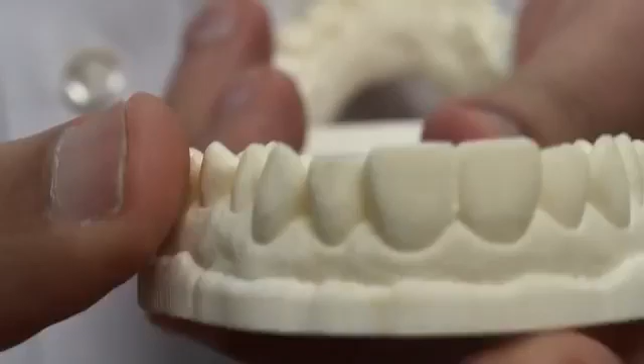If we take a closer look at this model, just to see what kind of quality we're looking at, we see it's got a very opaque material with a matte finish. What we've seen in other additive technologies is that those light-cured materials tend to have a somewhat translucent and shiny surface, which is very difficult to read, and can make it difficult for technicians working with those models. So we really love the look and feel of these models, and obviously the accuracy is an ante into the game to build digital models.

So what we'd like to do is walk you through the process of building these models, what it takes to get them into the printer, and then the post-processing for getting them ready to work with. I think you'll find that the post-processing steps for the MP3500 series printers with this great material are a very straightforward process to get a great final result.

And then what we'll do is some comparative analysis of the output of the final product and compare that to the original file to show you how accurate these models really are. So with that, let's get started.

All right, so we'll take a look at how we actually set up the build plate and send it over to the machine.

Okay, so now we're going to look at how to actually set up the jobs that we can send over to the printer. Today I'm going to be showing you the tool that 3D Systems provides with the printer called the Client Manager. This tool allows you to manage your printers, check the status, and set up jobs for them. I'll double-click our MP3500 icon here, and that'll load up our main setup window.

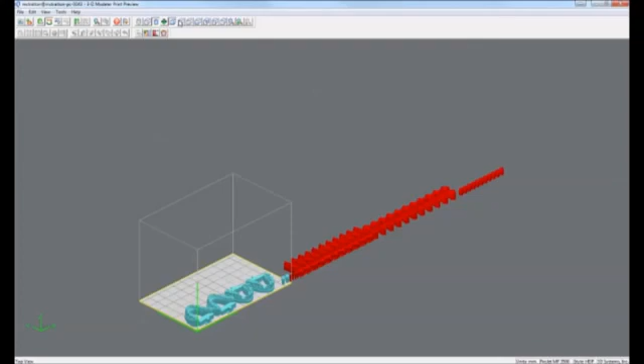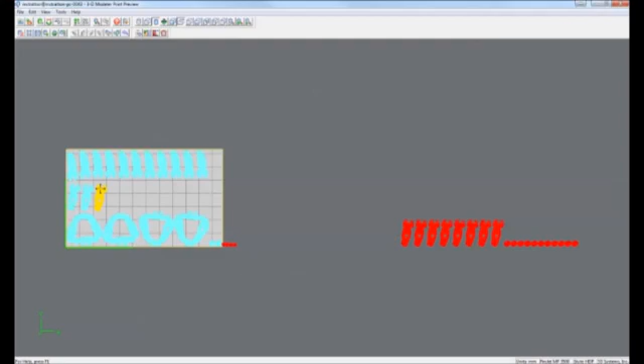Once those come in, we're going to click the preview button, which brings up the actual modeling program. This software does a decent job of auto-nesting parts, but in this case I have so many it's a little too overwhelming for the software, so I'm going to have to do some manual work to position these. This will be sped up a little bit so you don't have to watch the whole process, but ultimately you have full control over how these get oriented and placed on the platform.

So here is our finished platform with the parts nicely arranged. You can see you can put the dies inside of the full arches, which is nice. Basically all we do here is click submit, and there's very little calculation time that you have to wait for.

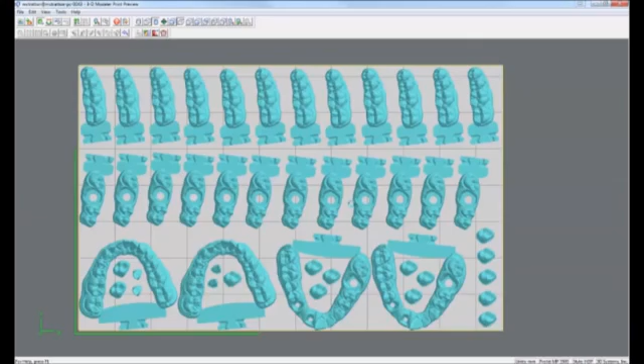This pretty much goes directly to the printer, even a platform of this size. Okay, so we've nested up our platform and sent it over to the machine. Let's get this loaded up, and we'll take a little tour through the system as well so we can see what all the components are.

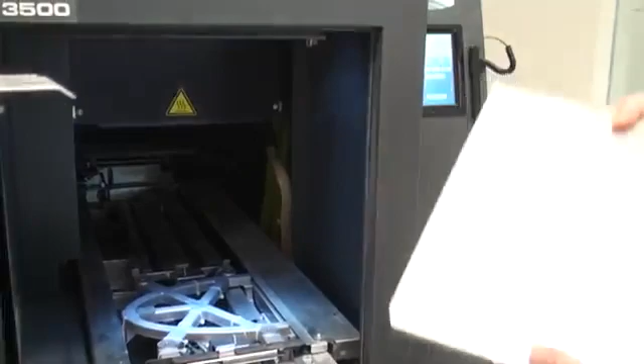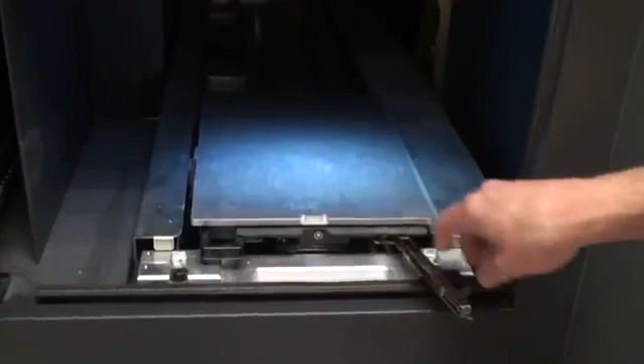We've got our clean build plate here, and this is just going to slide right into the machine. Basically open this little trap door here, slide the plate in. There's just a little groove in the front and back to lock it in place, and that's all there is to it.

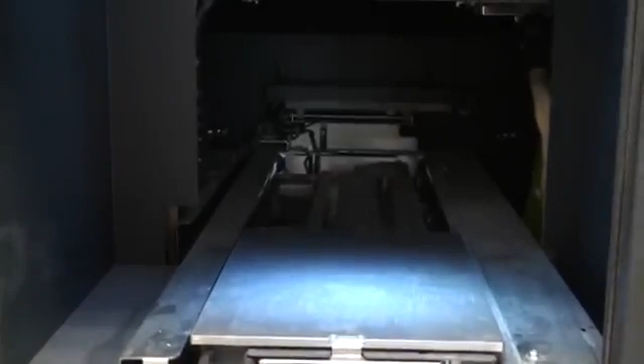Just inside the machine, you're going to see this platform roll backwards. It's going to deposit a layer of wax or part material depending on where it is in the build. There's a little planer that makes sure everything is perfectly level for the next layer to be deposited, and that'll repeat again and again until the parts are fully built. So we load that up, shut the door.

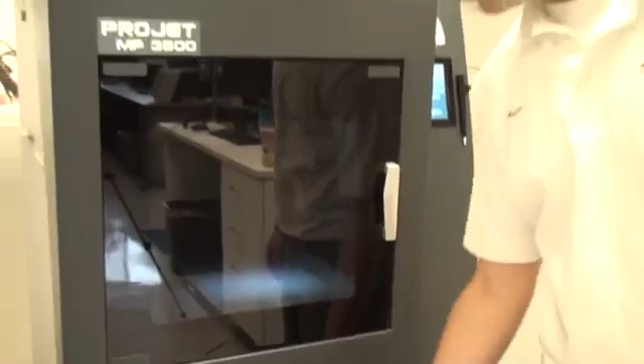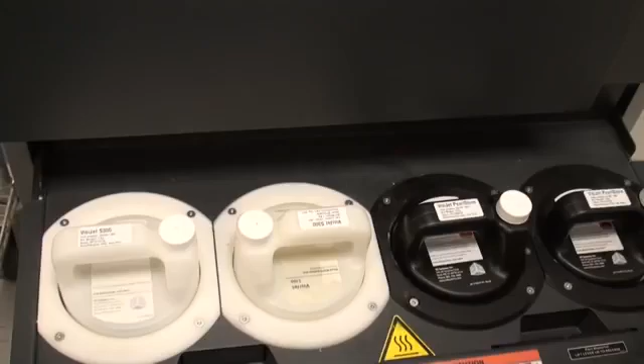To give you a little more of a tour of this machine, the second drawer here has all of our wax and part material canisters. You can see we have 2 of each type, so 2 wax, 2 part materials, which is very nice because one can fully run out and it'll swap over to the next one during the build. You can even swap these out during the build as well, which is nice. They're kind of hot swappable, so you can make sure you have enough material even if you didn't start the build with enough to begin with.

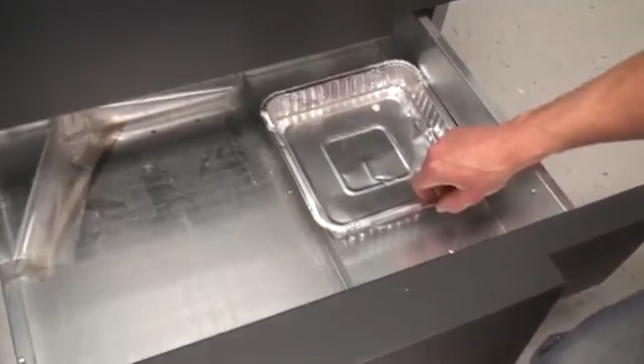Down below here, this is just the drawer to collect any wax residue left over from the print. When the planarizer comes and shaves off material, that'll end up draining down into here, which is just a little tinfoil collection basket, and it makes disposal very easy. So you can see a very clean workflow here.

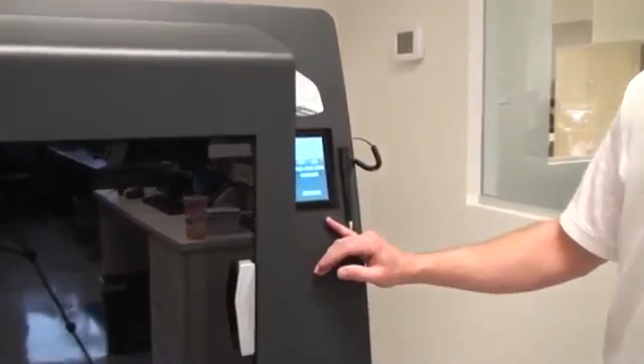Let's take a look over here. We have our computer control screen, and what we're going to do is indicate that this machine is now online. It's going to ask us, is the platform empty? Yes, it is.

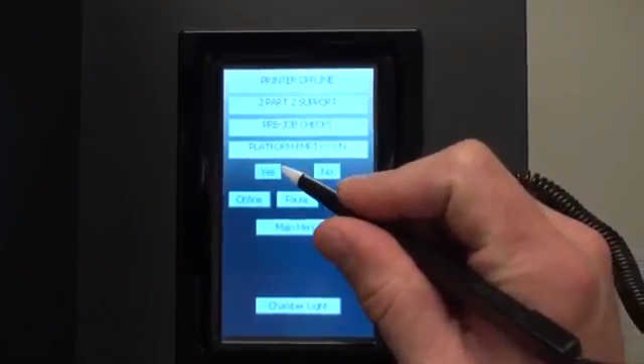We've already sent the job to the machine, but one thing it's asking us to do is make sure that we have enough room for the excess wax to dispose into. So we already looked at it, but we just need to open this door, check that we have enough room in our collection basket, and close it.

Then the machine is going to go through some initialization steps, cleaning the print heads, and the job will commence. So we'll check that out. We'll see a nice time-lapse video of this job being done. It should look pretty cool.

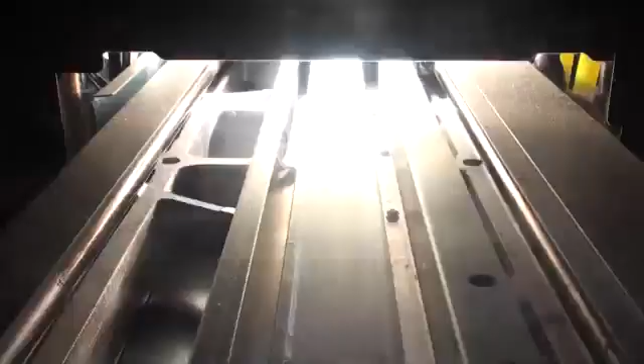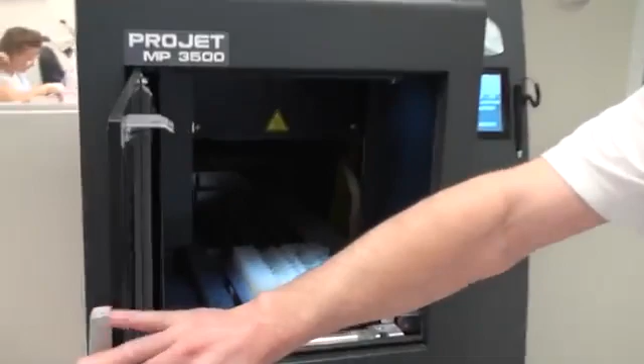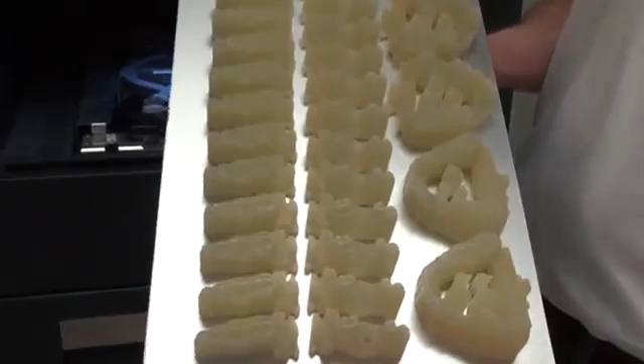Alright, our job is all complete now. It's been about 6 hours, which is about average time for a job like this. It's all based on the height of the parts, but this one took about 6 hours. Come in here, we're going to release the latch and pull out the build plate. This slides right out, and you can see our nice full plate here of finished parts. They look beautiful.

Now we can walk through the steps of how we actually post-process these into the final product. Let's get these parts off of this platform. It's a little peculiar process, but basically we're going to break off these dies by hand to start off with, and these can just be broken off with a little pressure from your hand. The easiest way to get these parts off of the platform is actually to smack it on the ground. So let's take a look at how we do that.

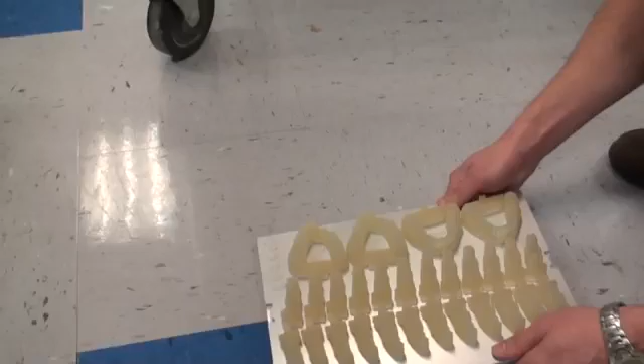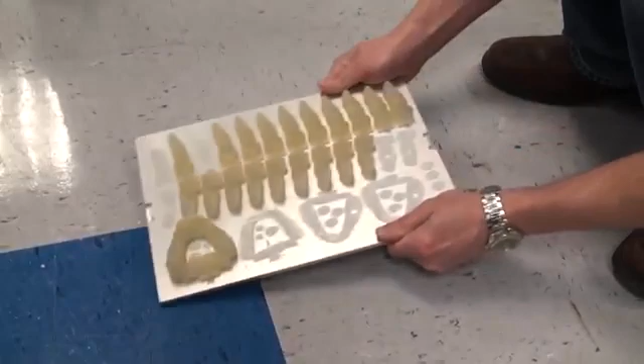We're just going to come down to ground level, try to get it nice and flat to the ground, and give it a few whacks. You can see it might take a couple whacks to get all of them off. Luckily the parts are very resilient, so there's not really much risk of damage here. Looks like we got some stubborn ones.

There we go. Nice clean platform. Alright.

So now we're going to go into the other room and throw these in the oven. We're in our post-processing room, and we're going to throw these parts into the oven.

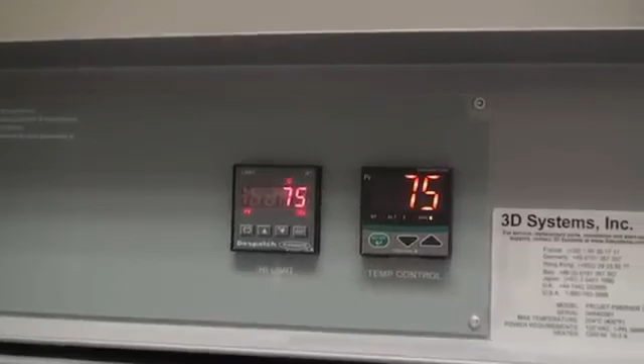You can see we have this oven from 3D Systems. It's set to 75 degrees centigrade, which is the correct temperature to melt the support material off of the parts. Take a look inside. As you can see, we've just got a grate here where the parts are going to rest, and there's a collection basin for any wax that drips off of the parts to collect.

And in the back you'll notice a Pyrex container containing some vegetable oil. So that's going to heat up to 75 degrees Celsius with the parts, and we'll basically dump the parts in there afterwards to clean off any of the remaining wax leftovers.

So first step, we're going to take our dies here. These can sometimes be small enough to actually fall through the grate, so we put them on a piece of paper towel just to make sure that they don't slip through. And we'll rest this right on the grate.

Now we can take the rest of our parts and just place them directly onto the grate over the basin.

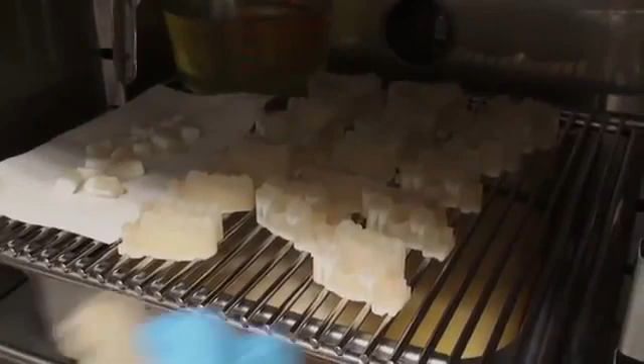Alright, so they're in the oven. We're going to close this door and wait about an hour for all the wax to completely melt off of the parts, and we can walk through the remaining steps at that point. See you in an hour.

Okay, we're back. The parts have been in the oven for about an hour and all the wax has been melted off at this point, so we can pull them out and perform the rest of the post-processing procedure.

So let's take a look in our oven. You can see all the parts are there, all the support material is basically melted off. There's going to be a little left over on the parts, but we'll take care of that.

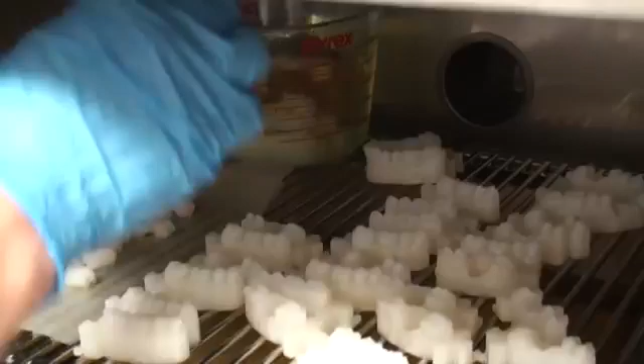We're going to utilize the oil that we've had in there as well, which is also heated to 75 degrees Celsius. So basically what we're going to do is take a few of these parts, dump them into the oil, and we're just going to demonstrate right now with a few of the parts, just so we can get through this process pretty easily. So take a full arch and a quad, put them into the oil.

This container is going to be a little hot, so I'm going to use a towel and pull it out of the oven. We'll keep the other parts in there so they can stay at the correct temperature.

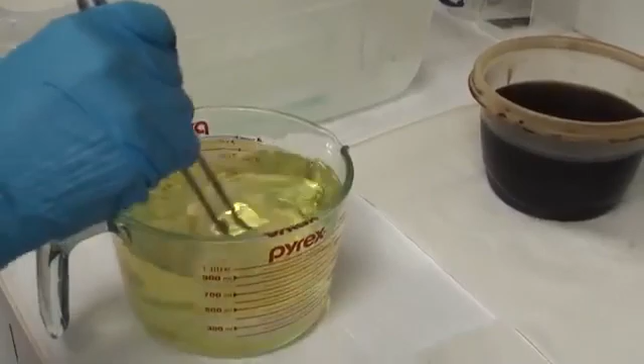Now we're going to come over here and basically just want to agitate these a little bit just to assist the remaining wax material to get off the parts. Doesn't need to be in there for too long, but you do want to make sure that you get as much off as possible. So I'll just stir this around a little bit.

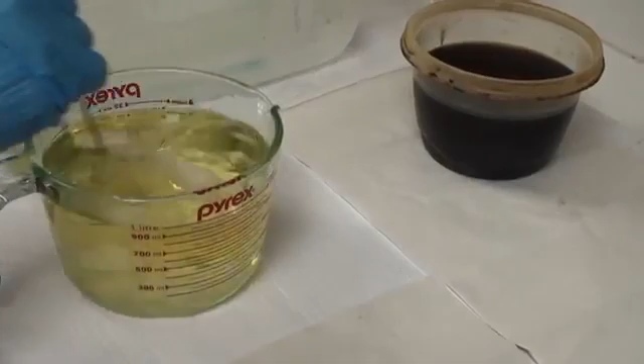Now the next step, if you look over here, we have a container containing isopropyl alcohol that's sitting in kind of an ice bath. And the purpose of the ice is basically to keep the alcohol at a cold enough temperature. What's going to happen is the models are going to be basically shocked, going from 75 degrees Celsius down to room temperature or less. And that's going to give it that nice matte finish that we're looking for.

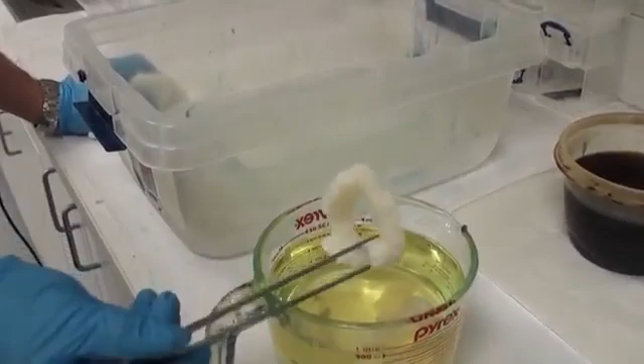And the alcohol is also going to serve the purpose of taking off any of the oil that the parts have been sitting in. So we can just go ahead, drop these into the alcohol bath, and that'll complete, or almost complete the process.

Okay, I want to give these a little stir to help any of the oil to fall off, and we'll let those sit for a minute here.

We basically just want these parts to fully cool down while in this mixture. And you can start to see it now, they're starting to get that nice white opaque color. It'll take a minute for the parts to fully cool down, but this is really the process where that matte finish is going to occur.

Alright, so we've dried off our parts, and the last step is to put them into the dye mixture. So basically we have a container here with, again, some isopropyl alcohol, as well as a few drops of this wood dye.

Actually, it's a very effective dye. You only need a few drops in the alcohol and the model will take on whatever color that we put in there. So these come in all varieties of colors. We've chosen the dark vintage maple for a nice beige color for the models, but you could really use any color you want. So we'll just take our parts and drop them into the dye solution.

Basically, we're just going to let these sit here for a couple minutes, and once they come out and dry off, we should have a nice finished product.

Okay, so our models are now out of the staining mixture and they're all dried here. So basically, we've got our final product, more or less.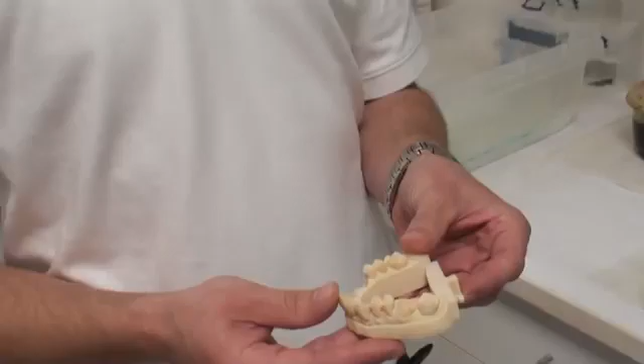Last steps here are to assemble the dies. So we're just going to slide these into the model. We got our two anterior teeth. We slide down nice and snug.

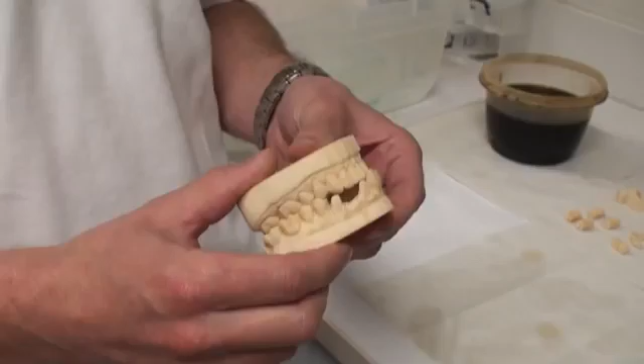And so we have our full model kit. It's ready to go. We're going to do a quick scan just to check out the accuracy of these parts, and we should be good to go. So let's go do that.

Okay, so we want to look at the accuracy of the models that we've just produced. One step that we didn't show you right here is we took the models that we just printed and showed you and scanned them in the 3Shape scanner. And now basically we're going to take that scan data and compare it back to the source data that we sent to the machine and see how they compare.

For this purpose, we're going to use a tool called 3Shape Convince. This is a utility available from 3Shape that allows you to do just this purpose, which is comparing two 3D models and seeing where they differ.

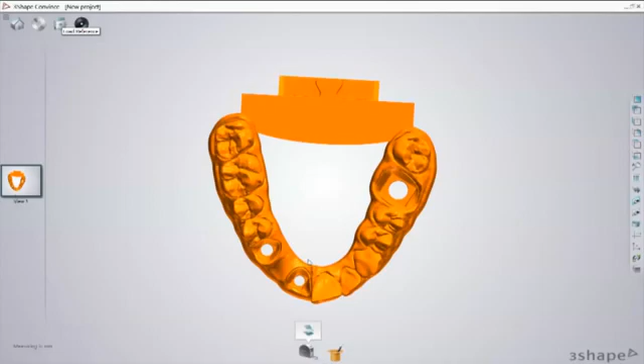So basically I'm going to come in here, I'm going to load my reference part, which in this case is the source data that we sent to the printer. Now I'm going to load in the scan of the model that we just did in the 3Shape scanner, and this will bring in that scan.

Now basically what we have to do is align these two models. So what we're going to do is define 3 points on each model that will help the software match these up in 3D space. As you can see, I'm rotating around, choosing the same points on each of the models, and once this is complete, the software will know at least roughly how to align these two.

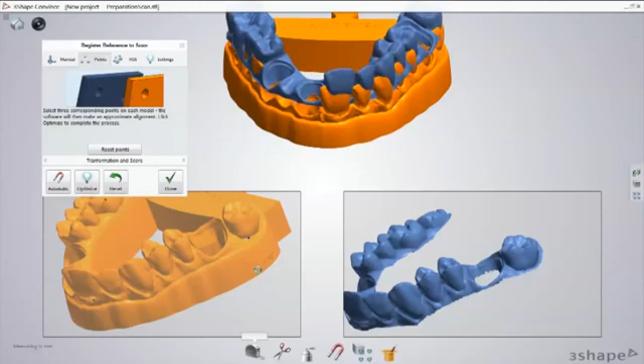So you can see them kind of converge right there. Now we'll click Optimize, which will basically try to do a best fit at this point to bring those two together. Once we're done with that, now we can bring up our heat map.

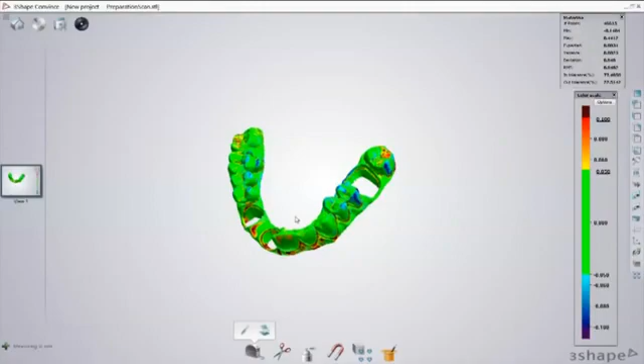This is basically a color-coded diagram showing us how far off certain parts of the model are from each other. We're working on a scale where everything that's green is within 50 microns of the source data. So you can see we have very good dimensional accuracy across the entire arch, especially this cross arch.

As well as the contact regions are pretty nice. Maybe some of the cusp tips are a little short, but ultimately for our purposes this is going to be a very accurate model to work with.

Okay, now to make sure we've covered all our bases, we're going to look at the accuracy on a single die that we've just printed. So we're going to walk through the same steps in order to analyze the die.

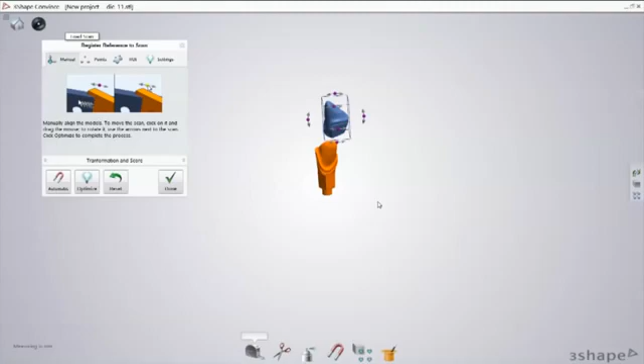First off, we're going to load the actual data that went to the printer. Now we're going to load in our model scan of that die that came off of the printer. We'll go through the same alignment steps that we did with the full arch by designating the 3 points on each model that will help the software align them together. So I'll just take care of that.

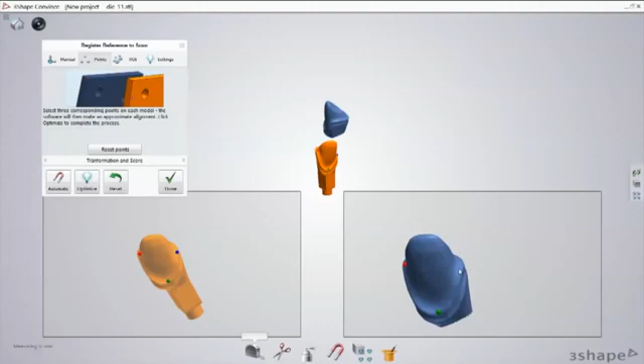Okay, software brings the two together nicely. We'll click Optimize here again just to get it to that final best fit of the two. Click Done. And now we can bring up our heat map showing us any differences.

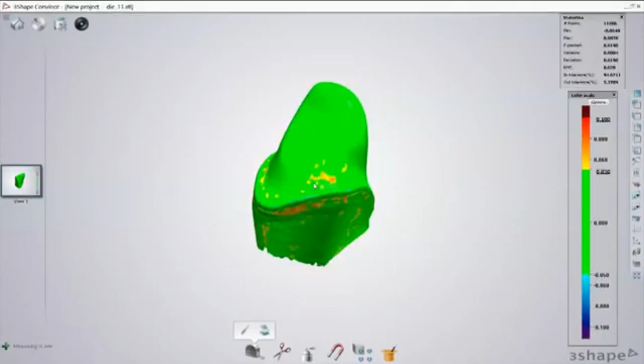We start off with the 50 micron, and basically everything is within our 50 micron band. So why don't we drop this down a little more? We'll bring it to 35 microns. So everything that's green is plus or minus 35 microns.

So you have a couple areas of orange, which, at least in the case of dies, is a good thing. If anything, that'll be a little cement gap, but it's at such a small scale that it's not going to really impact the fit anyway. So regardless, I'd say that we're getting pretty good results off of this printer, and something that everybody should feel really comfortable working with.